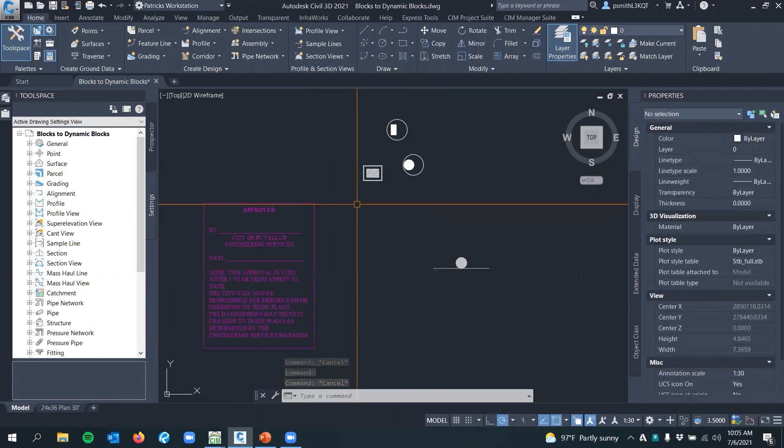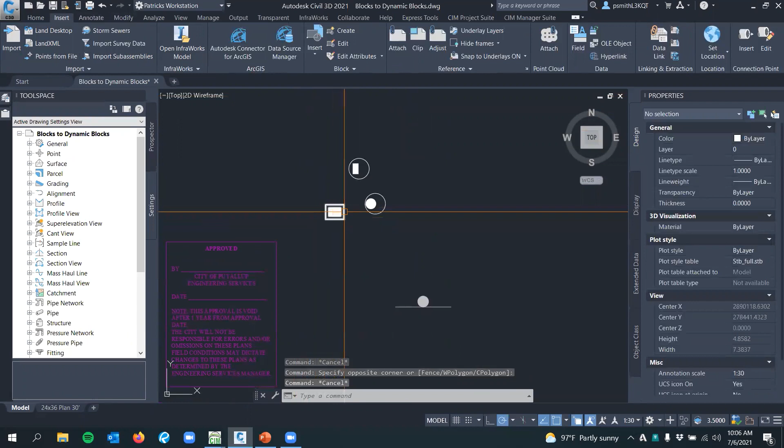All right. For this demonstration, I could do an entire webinar just on dynamic blocks, and I might do that in the future. But what we want to do is, let's say, instead of having all these blocks added into our block library, we want to just reduce these down to one single block. To do that, we're going to use dynamic block functions. So to start off, I'm going to actually create a block.

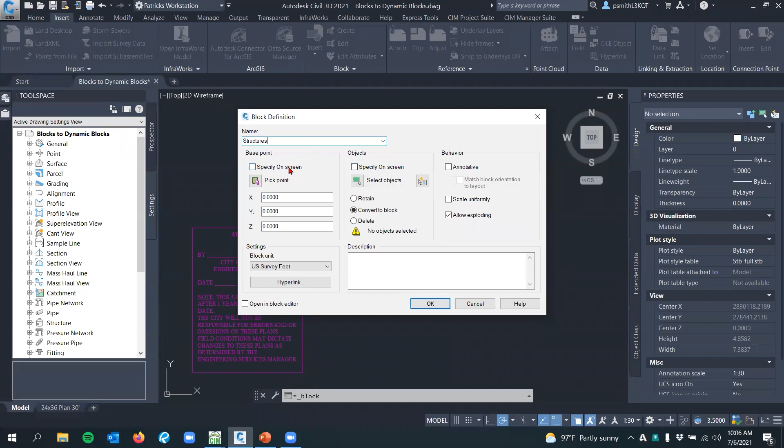I'm just going to call this structures. All right. We're not going to select objects. We're just going to leave it as is. And we're going to hit OK. It's going to pop up with a thing saying, well, you need to select your blocks. But we're just going to go ahead and hit continue. So we're going to make an empty block.

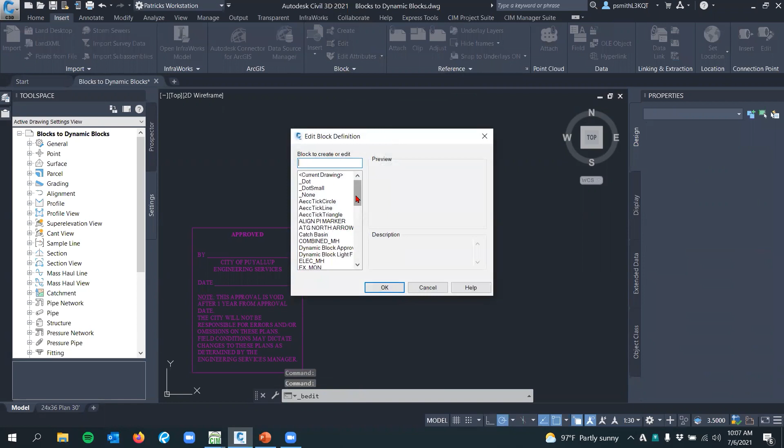And I'm going to go straight into the block edit button here inside of blocks. I'm going to navigate down to that block that I just created. From here, we're going to be inside of our block editor. We're going to be using the block authoring palette here. If you do not see the block authoring palette, inside your block editor tab, come on over to your manage and then authoring palettes here. Sometimes it might be turned off.

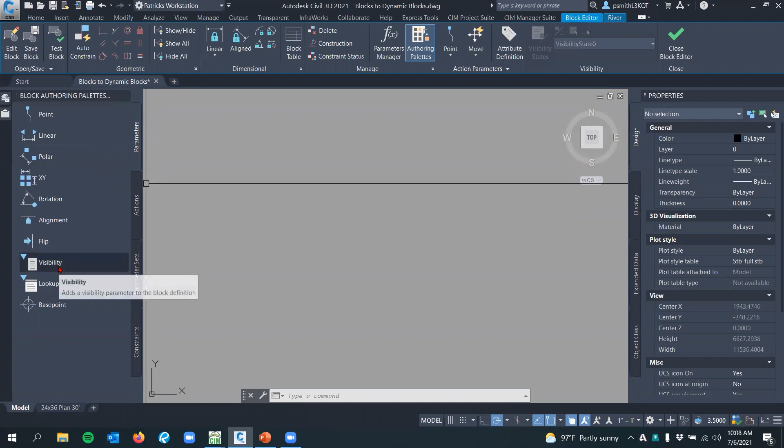This is where the majority we're going to be working in here today. So first off, I want to activate these visibility states so I can use them. Right now, everything's grayed out. As you can see, you can't click on it. And what I'm going to do is come over to my block authoring palettes, come down to the parameters tab, and then I'm going to go to visibility. I'm just going to throw that in right there.

From that, I can now work inside this visibility panel. I'm going to go to visibility states. All right. I'm just going to label all the different types of blocks that I want to add in here. So the first one, I'm just going to rename. I'm going to do type 1 catch basin. All right, I'm going to do another one. Type 2 catch basin. Do another, sanitary manhole.

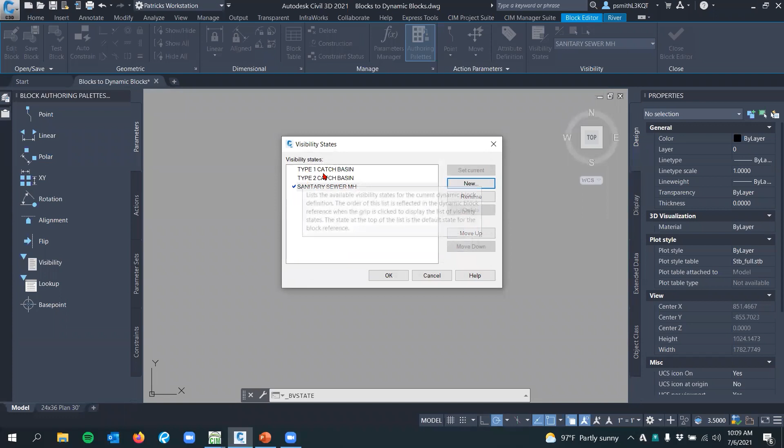I got all three. Now you can add more. Essentially, you can add as many as you want. Bear in mind, depending on the complications of your block, I would only have around 10 to 15 total inside your visibility states. Try not to go any more than 20. Once you start doing that, your dynamic blocks will start to bog down from too much information inside that block.

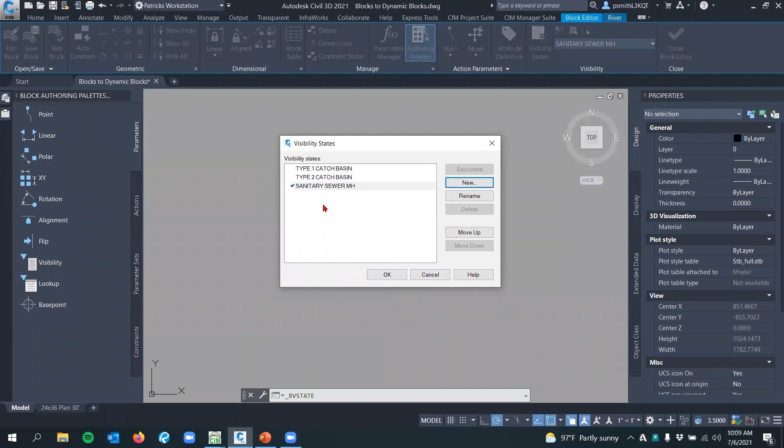We're just using 3 here. If you used up to 10, I don't see a problem with it. I've used up to 15 and not had an issue with that. So now that we have this, we're just going to go up here, set current to this first one here, hit OK. As you notice right here in the visibility area, you can switch between what visibility states you want to use. We're going to start off with the type 1 catch basin.

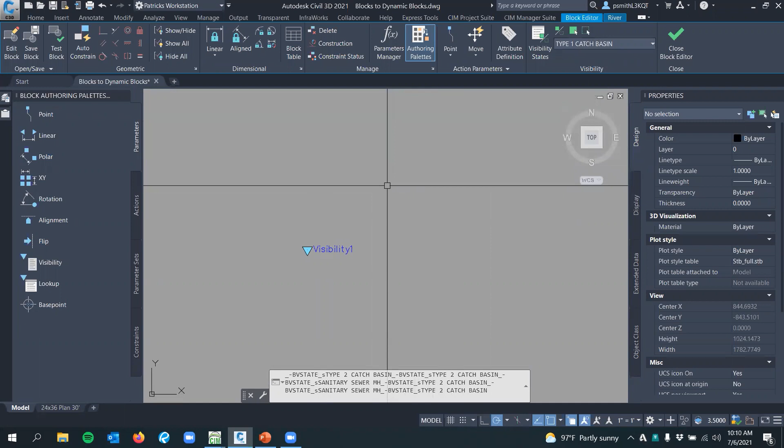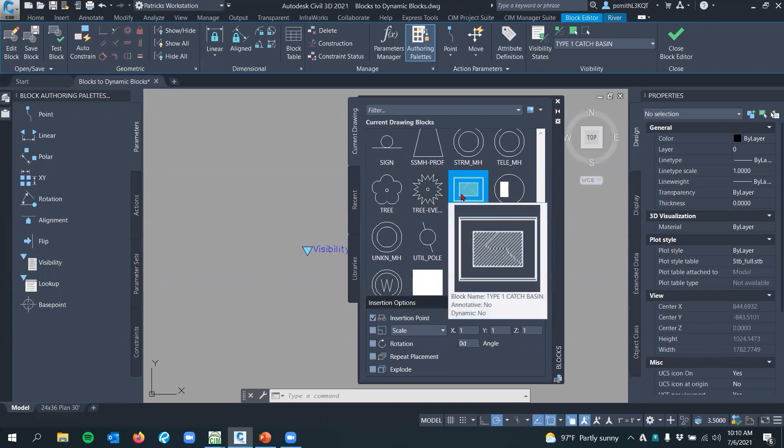All right. And with that, we're going to import our type 1 catch basin that we have as a block. And I'm going to do insert. Popped up on the other screen. Bring that over. Navigate to my type 1 catch basin. All right, this is it. I'm going to bring it in a different way here. Insert blocks.

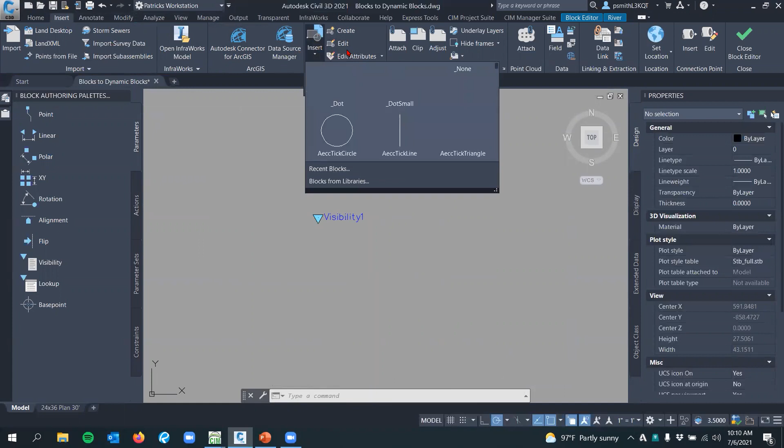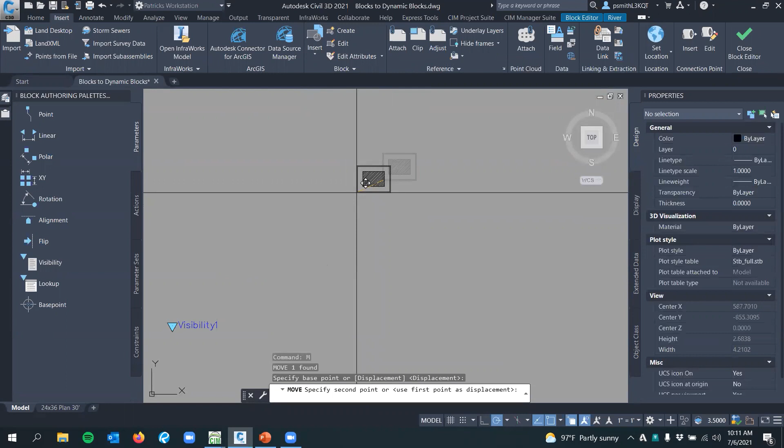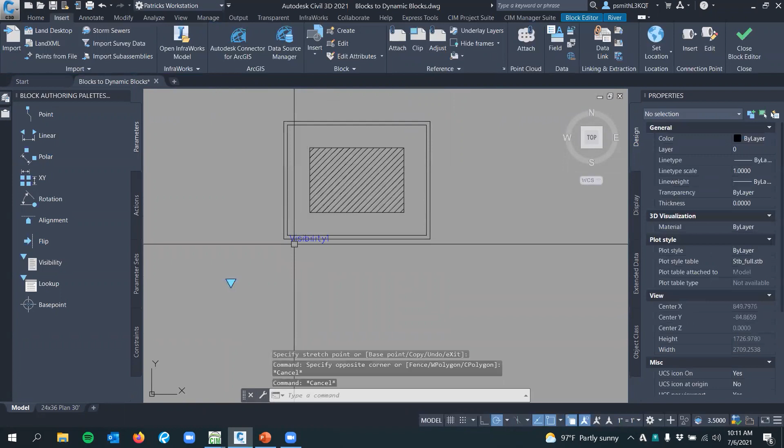All right. Where you place this block depends on, so normally you're going to want to have this placed in a decent spot in your coordinate system. So I'm going to place this at 0,0 at the bottom left-hand corner of the screen. I'm going to move this. If I can find it now. There it is. That back, that guy.

All right, now that my block is in here, the whole idea is to reduce my block library. So I'm going to explode this block inside here so we don't have a block inside of a block. Now you can see that all the parts here are their own parts. Go back up to insert. Well, first off, go back to block editor, go to your type 2.

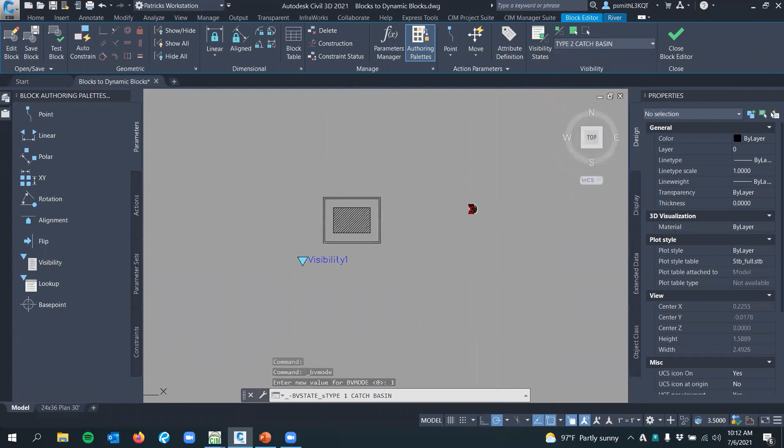Now, if I wanted to see where my other ones are, all I have to do is hit this visibility state and it'll show you what's on your other visibility states all in the one. So at the first start here, I'm going to go ahead and leave that be. I don't want to see my other blocks. I'm going to go to insert, type 2 catch basin. I'm going to move this to 0, 0.

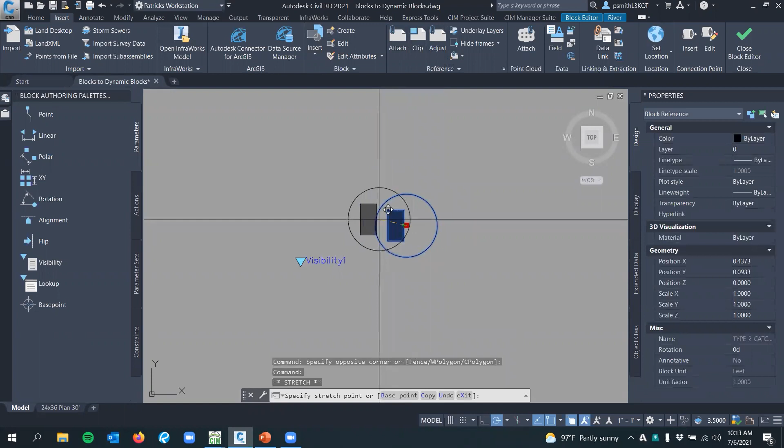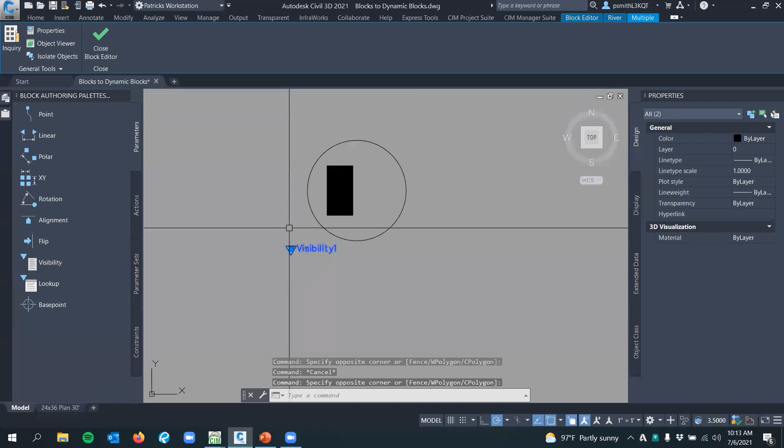Where this visibility button is, that's where you're going to be able to move and switch your blocks. And it's going to be the same position for all the visibility states. So you might be moving this around, trying to find the best location to put the little arrow. All right. So now that I have my type 2 catch basin, I'm going to insert my sanitary sewer manhole. Oh, one more thing. I want to explode that. No sense in having a block inside of a block.

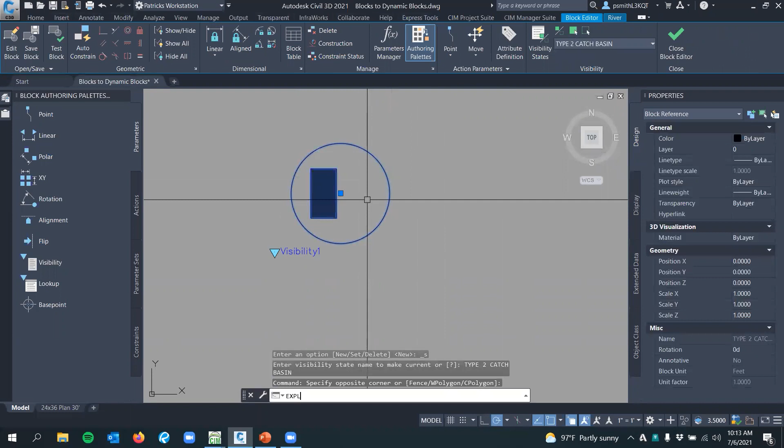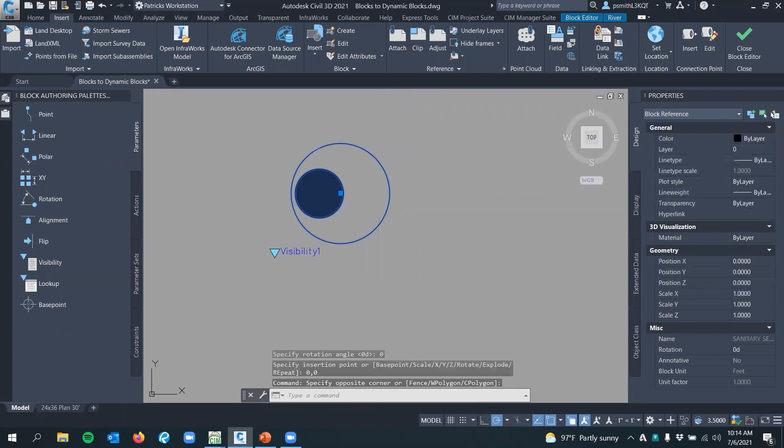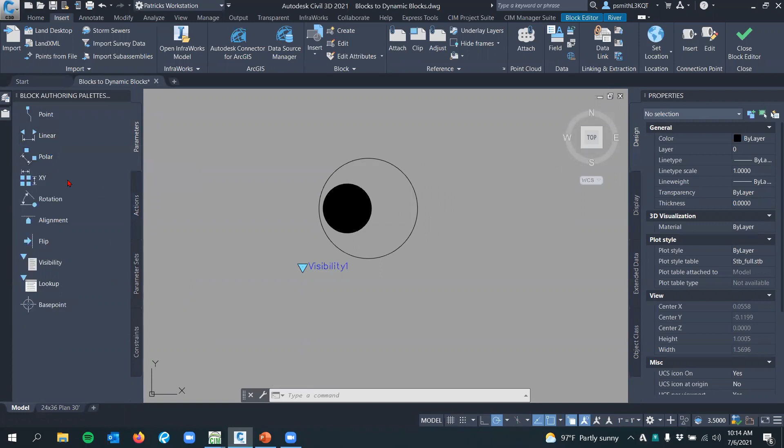All right, go to my sanitary sewer manhole, insert, and find the other sanitary sewer manhole. There we go. I'll put that at 0, 0, and then explode this block as well. All right. There's a ton of things that you can do with dynamic blocks over here. But all we're working with is visibility states. There are some very useful other parameters in here, making things longer, rotation, aligning blocks, all that I can cover in some other webinar in the future. Also, there's other videos on YouTube you can check out. But today, all we're concerned about is the visibility states.

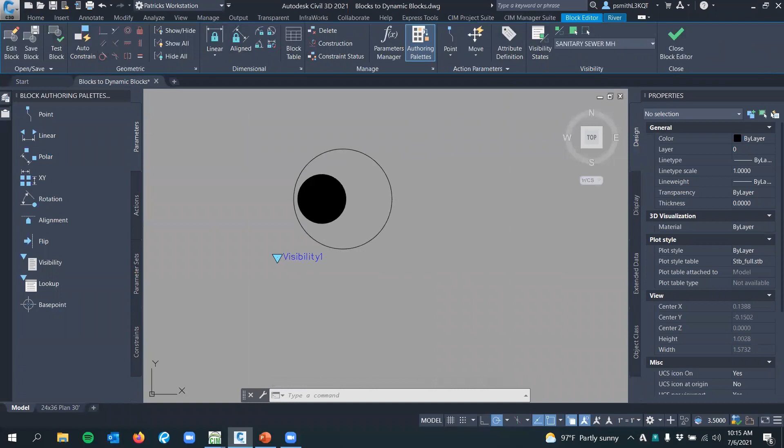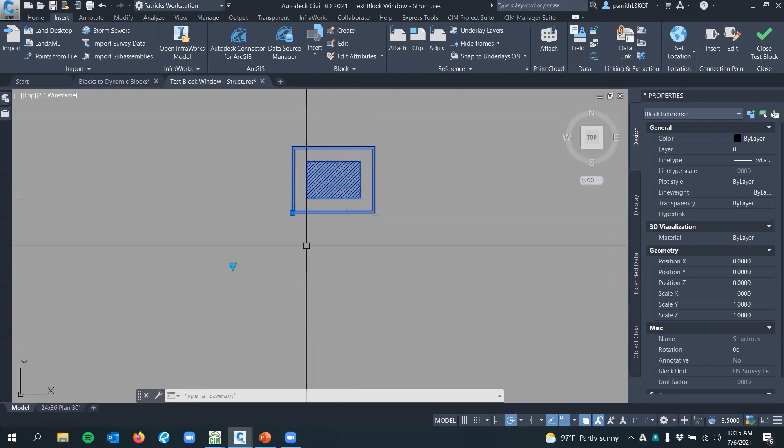All right, so now we can come to our block editor and test out our block before we close out. Hit that test button there. As you can see, there's a drop down arrow here. It'll let you decide which one you want to create. For this type 1 catch basin, I might end up moving the insertion point to the center of it, but I'm not going to worry about it right now. Just know that wherever you have that placed, everything's assigned to 0, 0. So place it accordingly.

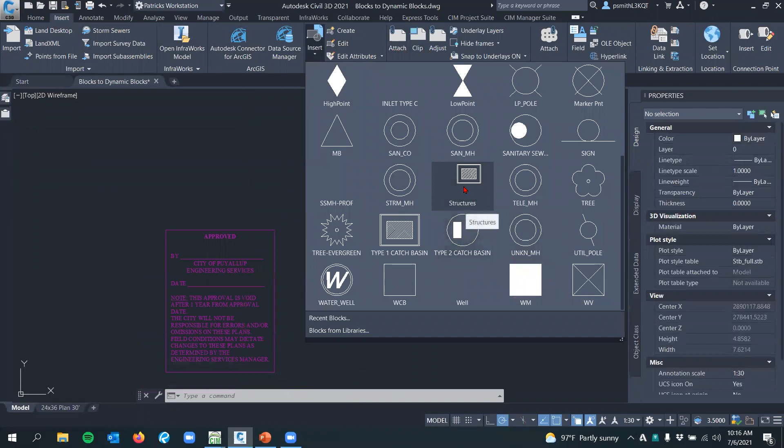I'm going to close out of my test block. Good. And then I'm going to close out of this, save changes. Yes. Now I can purge these blocks out of my template or wherever you store your blocks. I can purge them out and I don't need them anymore. So if I go to insert, find my structures here, place it in, change between all my dynamic blocks.

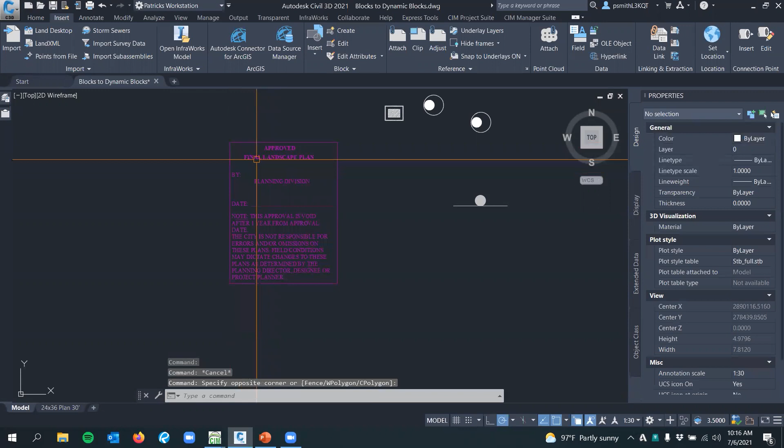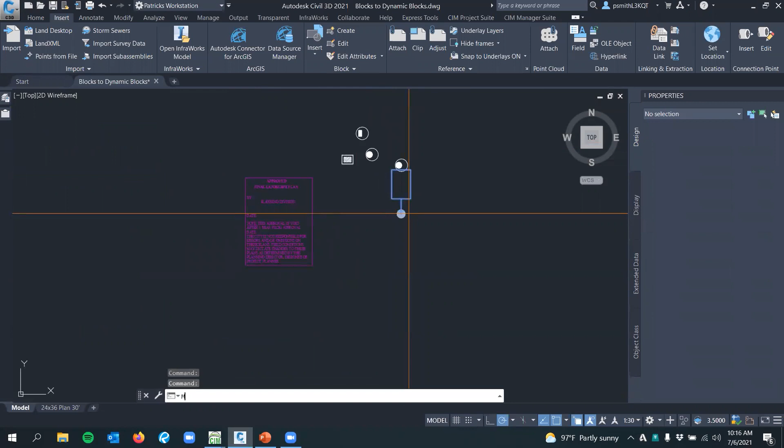So here I've got a couple different examples of what you can do. I have approval stamps here. So fire approval, engineering approval stamps, water approval stamps, just the different types of stamps. And then you don't have to go through and look for the different stamps that you might need to place on your drawing. These probably go on the title block. I have here different light poles, different odds and ends for street signage and all that, as you can see here. So with that being said, all of these blocks can be one block instead of having multiple blocks.

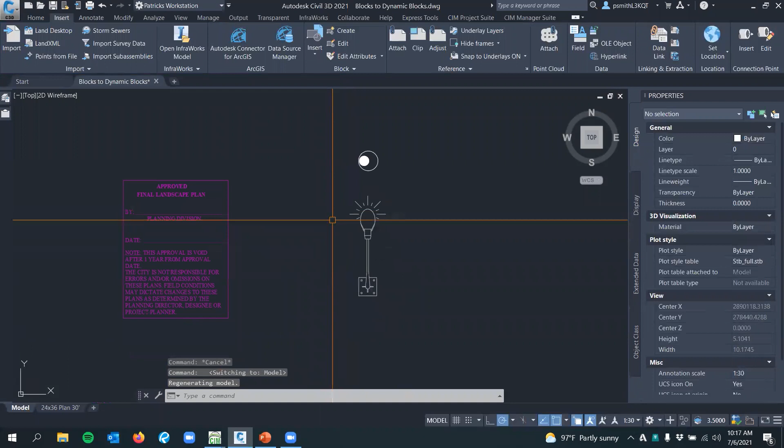All right. So from that, I'm going to move on over to the viewport creation. And if you had any questions about the dynamic blocks, I'll try to answer them best as I can. Come back to these as well. All right.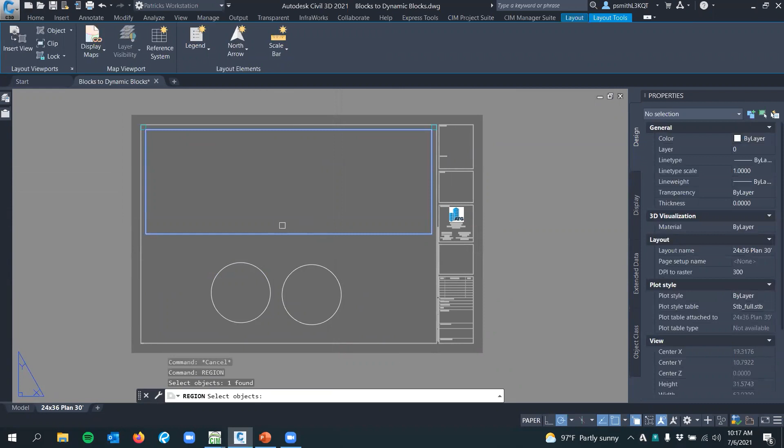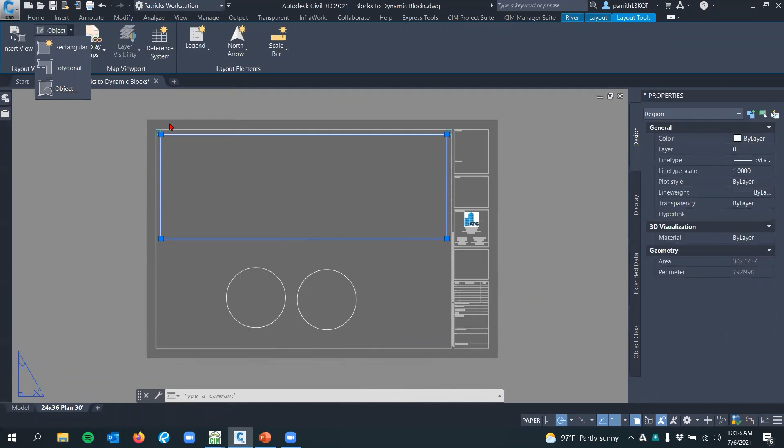I'm going to select all three of these. I have two circles down here, but I'm really only going to be using one, and I'll show you the whole reason behind these. So right now I have everything turned into a region. So let's come in here and turn this rectangle into a viewport. You can go to your layout tools here and select turn an object into a viewport, and that's what we're going to do here.

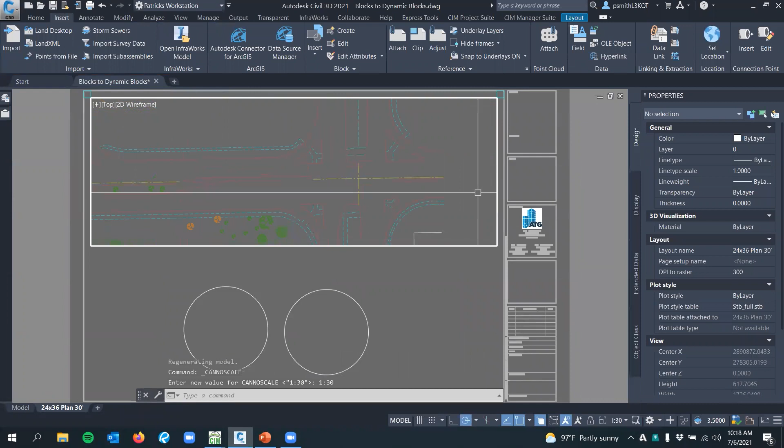We're just going to turn this viewport here and zoom into my area here, do a region. Do 1 to 30. That'll be fine. All right, so now I have a region showing as a viewport, as you can see here.

All right. Let's say I wanted to have a detail of something, and I just wanted this entire section here to be circled out, but I don't want any funny lines going through. I know there's a method that if you wanted to have a circle inside of a viewport, you can do that through polylines, and you'd have a line coming down here. But with region, pretty clean. So we're just going to use a command called subtract.

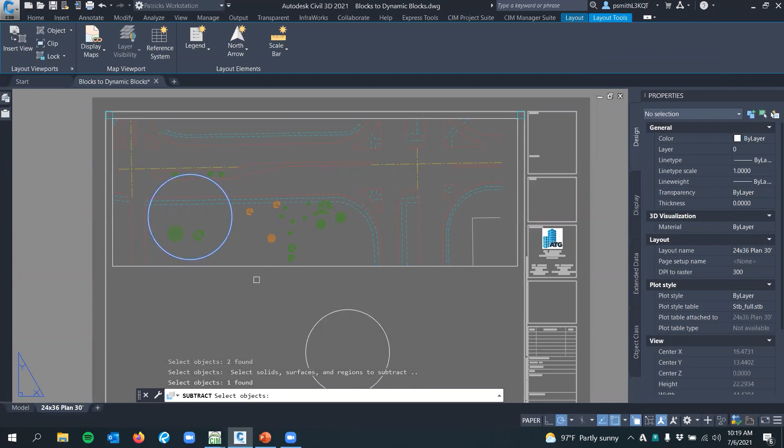All right. We're going to select the rectangle region and then spacebar, and then we're going to subtract the circle region from the rectangle region. All right, now this is still one viewport here, and then you got this circle right here. You don't have any funky lines coming through. This is all a viewport. You can still move things around. It's all going to be all one viewport there. You can do funny different things here.

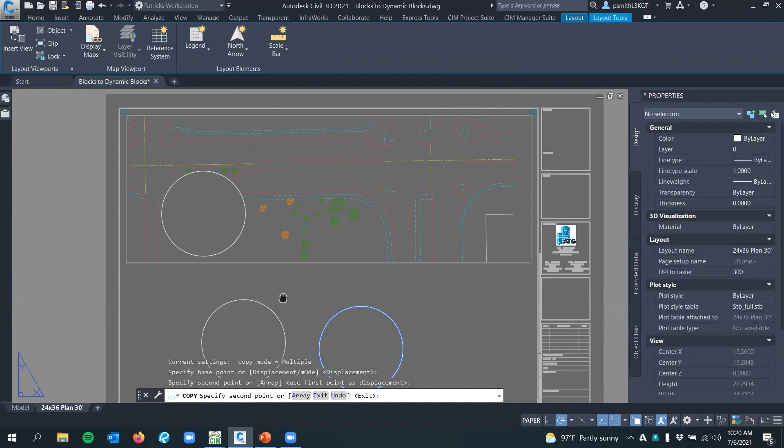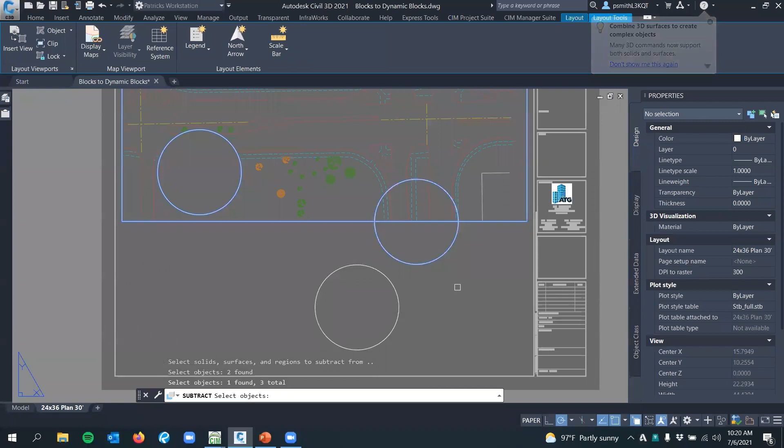I'm just going to go ahead and copy this over. Let's subtract again, move this, let's just put it right here. Subtract, select the viewport region, select the circle. Do that again here, subtract, region, circle, boom. Oh, little thing in there.

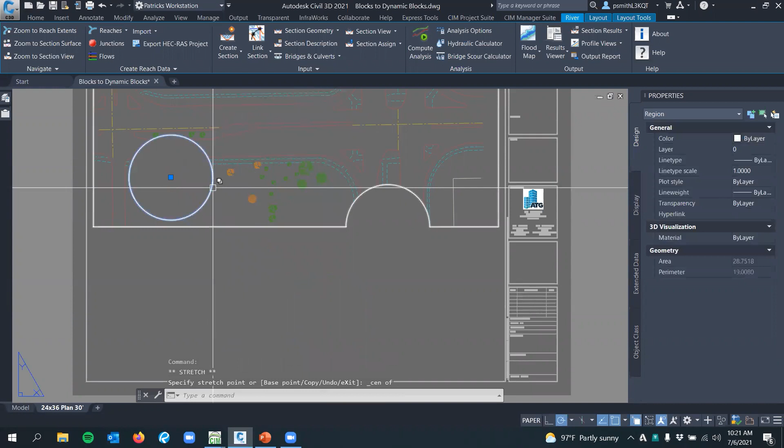Let's say that you wanted to put the circle back, and you don't want a circle there, to try to get things back the way they were. Well, I'm going to take this region here. So this is still a region. I'm going to take that region and move this to the center of that circle there. I'm going to use a command called unify. So unify, or union, I'm sorry, union.

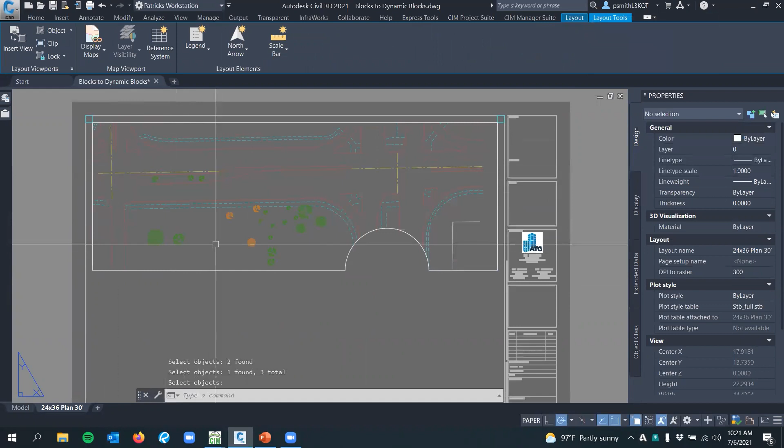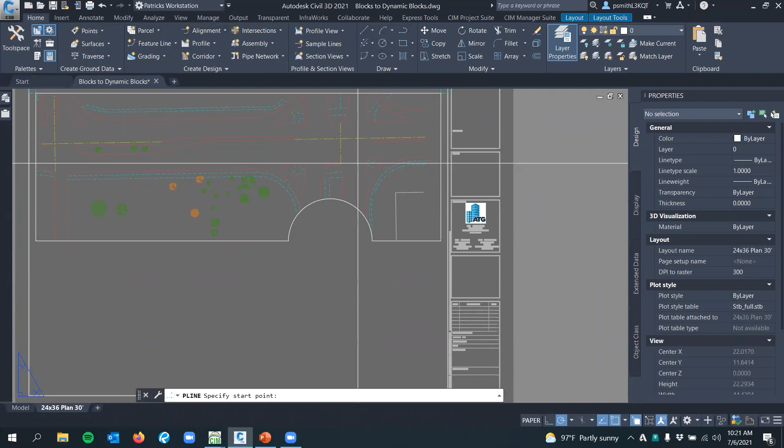I'm going to select the region here, and I'm also going to select the region here and then spacebar, and pretty much bandages it up. There's no more circle there in the viewport. I can do the same thing here. However, keep in mind if I were to add a circle here, it would put the whole circle in. So if I wanted to fix this, I would have to make a funky little thing here. There, C for close.

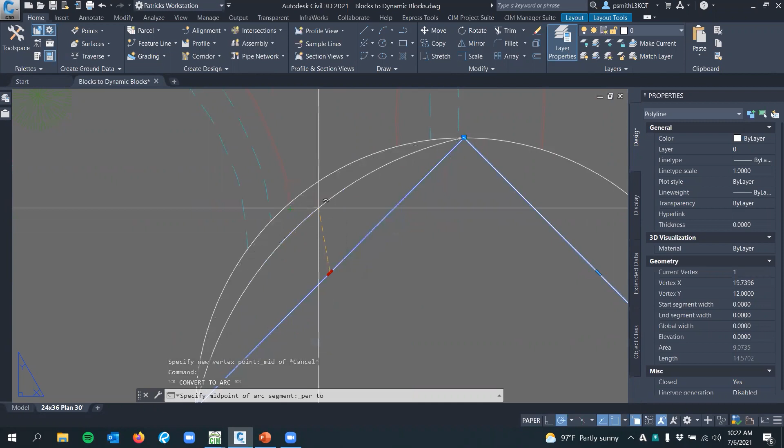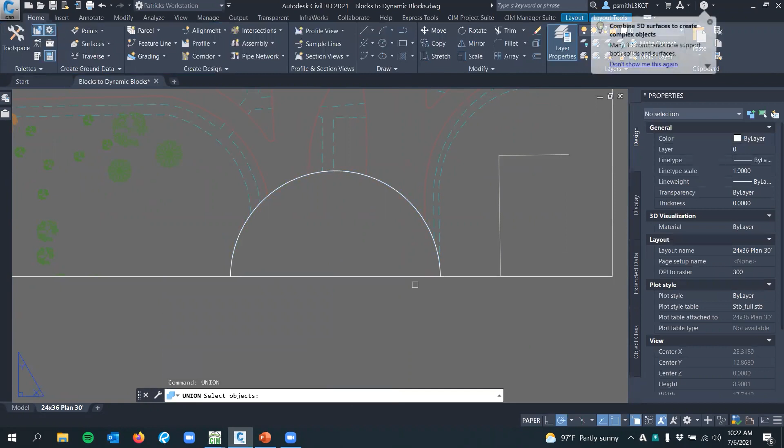Turn this into a region. So now that's a region, and I'll union that region, brings that back to life. Unions is a different way to make a viewport, but it can be pretty helpful if you're trying to add certain details and you want to spice up your viewport creativity here. Just different methods of creating viewports, that's all.

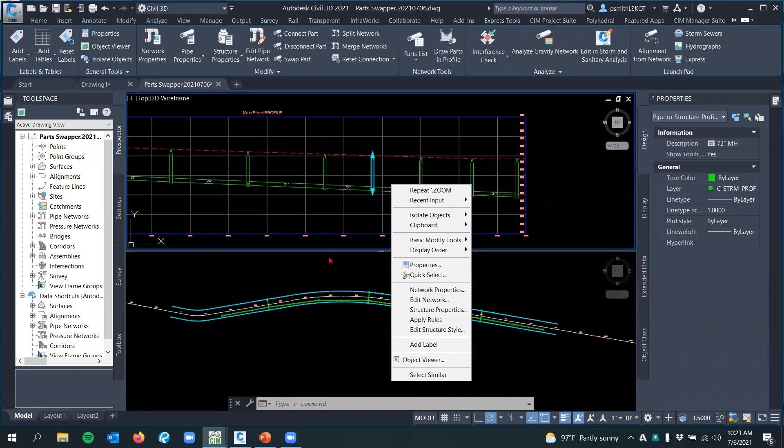All right, so next up, since we don't have any questions yet, I'm going to go on over to my CTC tool, Parts Swapper, and show you a little bit about that. Parts Swapper is for when you're using pipe networks. Normally, in order to swap a part, you would have to swap the parts individually from part to part.

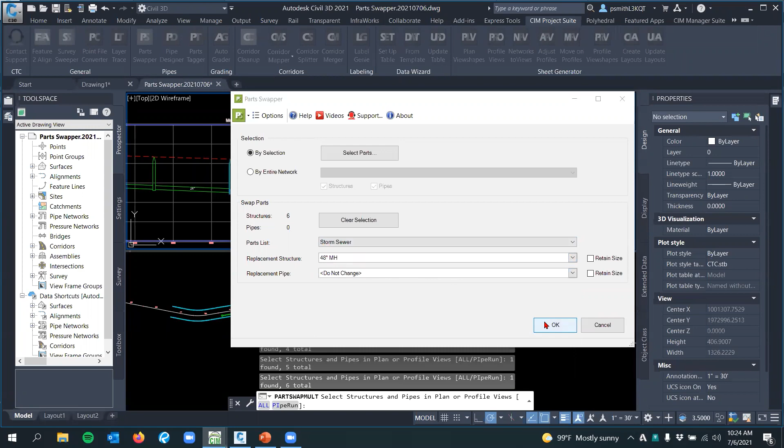Where Parts Swapper comes into play, you can click on the Part Swapper tool here. Any of these light green tools up here, they're all free. Right now, I'm just talking Part Swapper today, but I would select the parts that I wanted. This little Part Swapper box will come up, and down here it says I have 6 structures selected. I can change them all at one time. Say we want to do 48-inch manholes. I hit OK, changes all of them at once.

Let's say I want to change the pipe sizes from 24-inch for some reason to something else. I'm going to go to my Part Swapper, select the certain pipes that I want to change. Maybe they get larger right at that point there.

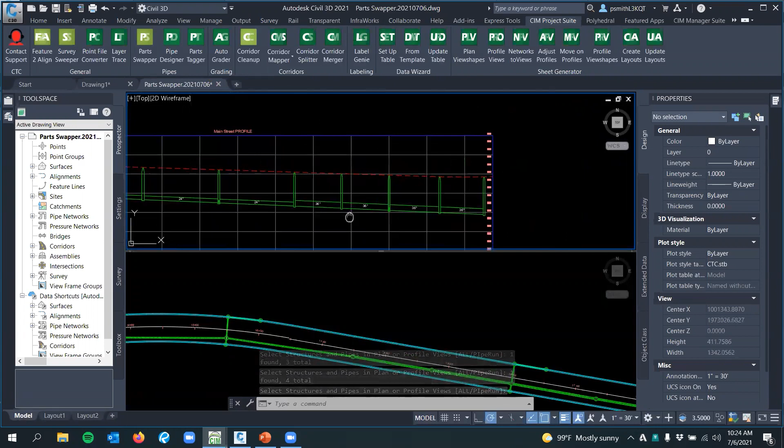Go to my replacement parts. Let's do 36-inch concrete pipe. Okay. And all of a sudden, they all change at once. You can do entire network plans, sizes.

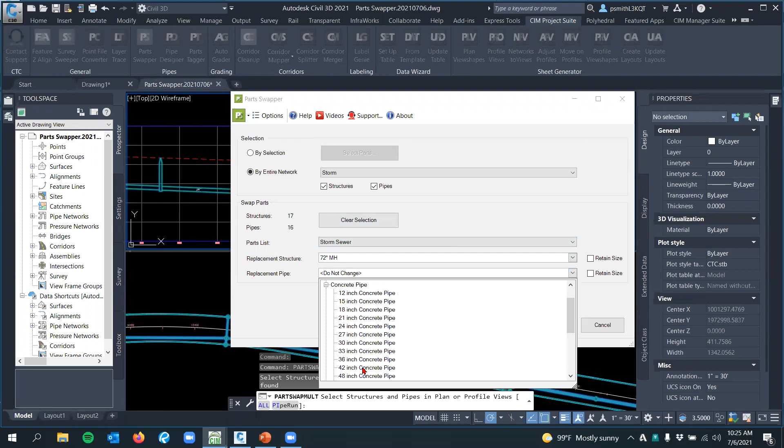So let's go here, select by entire network, storm, the entire thing, change them all to 48-inch or 72-inch manhole, and then we can change all the pipes to 48-inch. Okay, changes all at once, instead of doing it on an individual basis.

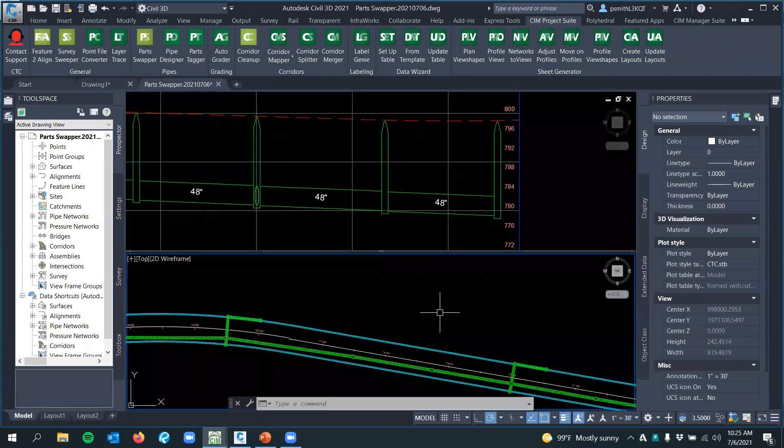Again, this tool is free. If you don't have it, I don't know what you're doing, but it's a free tool. Pretty handy piece of civil tools here. So, one of my favorite tools in the CTC lineup here.

All right. So next up, what I want to show you guys is the laptops that we use here. If you're working on a slow computer, I don't know what you're doing, but the computer that I've been using for the last year and a half has caused me absolutely zero problems, and it will handle anything that I've thrown at it.

This is the basic model of a BIMBox laptop. I would suggest a 64 gigabyte DDR4, but this 500 gigabyte NVMe drive, that's the fastest thing that you're going to get. You have an 8-core processor. Now, Civil 3D technically only runs off of a single core unless you're zooming in or you're doing some rendering.

However, where the multiple cores come in with the BIMBox here is if you have other programs open at once. So let's say you've got 2 Civil 3Ds open, as I do right now, and then I'm also running a Zoom call, and then maybe I've got my emails open. Well, you have multiple things. You're going to want a decent amount of cores for your computer to handle that.

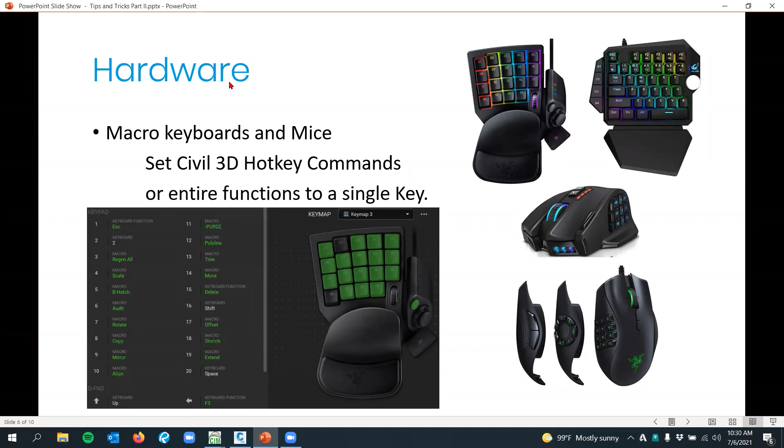Again, macro keys. You can get a mouse here with, I think, 12 different keys on the side. This one down here is a Razer, and I don't remember what this one is, but they're gaming mice. So if you're going to look for these, go to your local Best Buy, to the computer department, and they'll have these gaming mice, and you can set up your macros and just cruise right along. Set them up, and have a productive day.